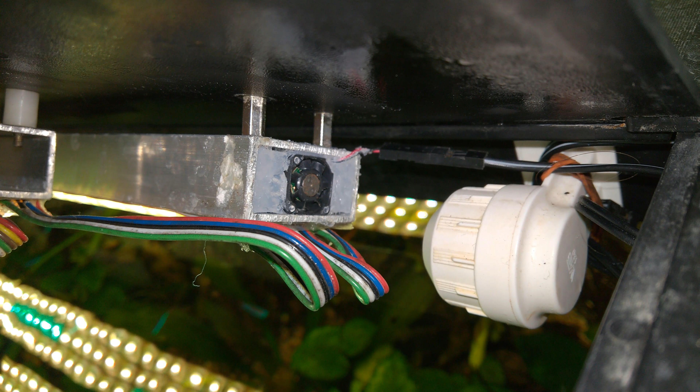This fan cools the LEDs. It is not very efficient, therefore I have to replace it by a larger one. A larger fan will require special fixing on the aluminium profile. That's why I'll have to produce a component on the 3D printer.

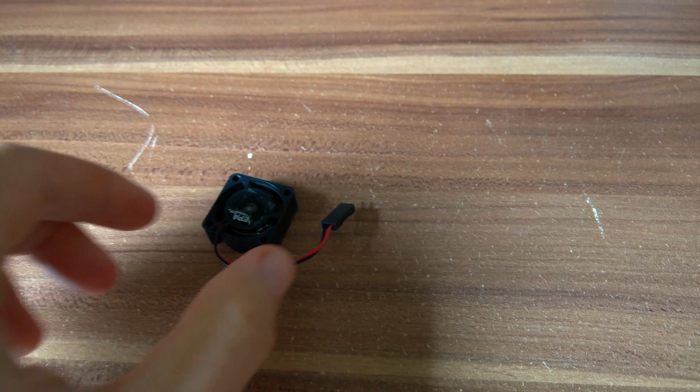This is the fan I decided to use. The dimensions are 25 by 25 mm with a thickness of 10 mm. I'll have to create a little cover for one side and a component to fix it on the aluminium profile for the other side.

I got some alternatives on eBay. This one has 17,000 RPMs with a thickness of 10 mm and the other is 7 mm thick only with 10,000 RPMs.

To be able to create some components on the 3D printer, I need to know the fan's dimensions. So I'll start searching for the corresponding datasheet first. In the datasheet, I'm primarily interested in the fan's dimensions.

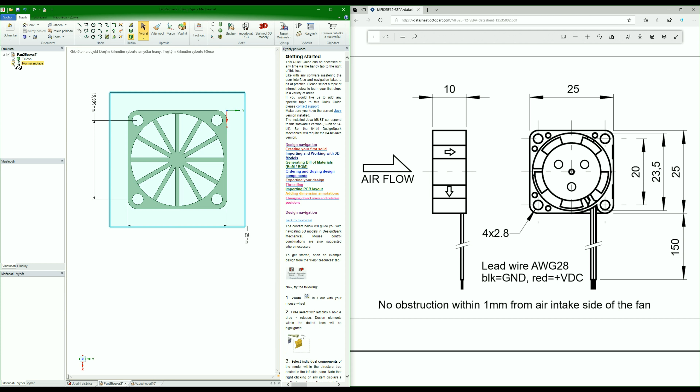To design components, I use the DesignSpark Mechanical application. Using the dimensions I found in the datasheet, I designed this little cover for the fan. Further, I designed this air duct. It will serve to fix the fan on the aluminium profile.

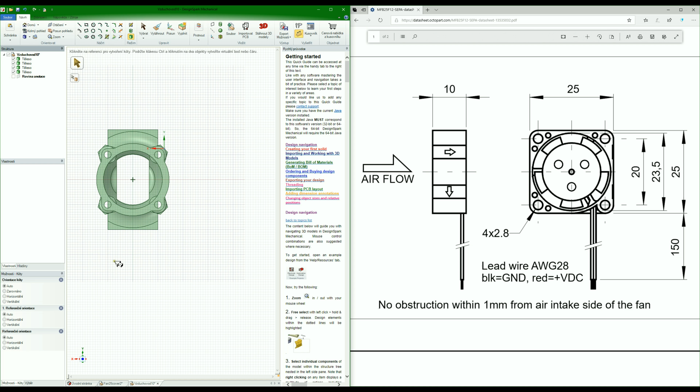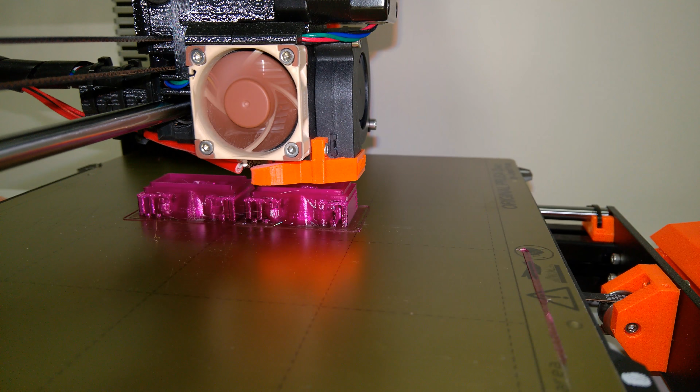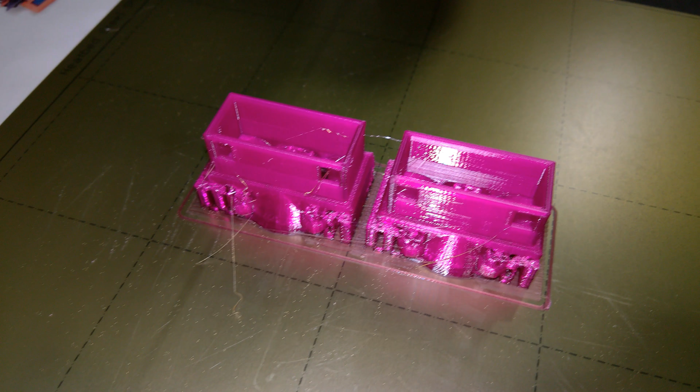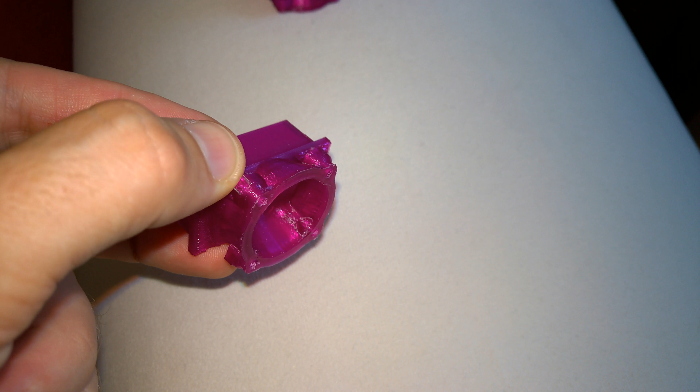Here we can see the components being fabricated on the 3D printer. These are the final products right after the fabrication. And this is the air duct after its cleaning. And this is the fan's cover.

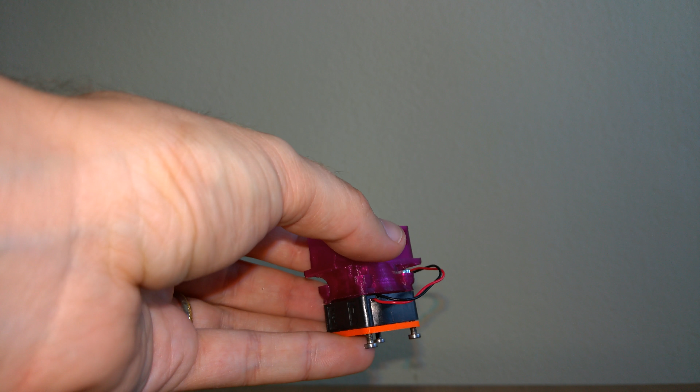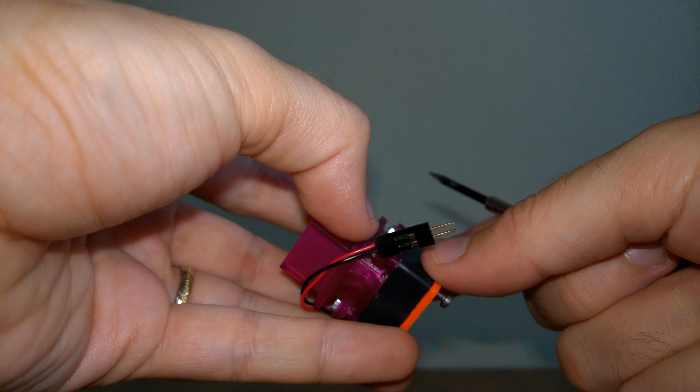Now it's time to assemble all three parts together. I used screws of size 2.5 mm with a length of 20 mm. The resulting module seems to be quite big. Let's check the space in the aquarium.

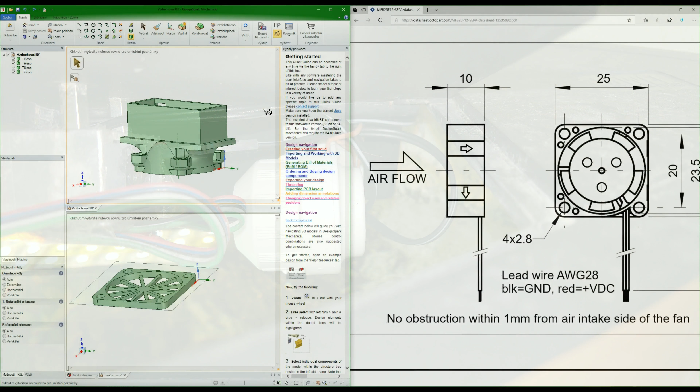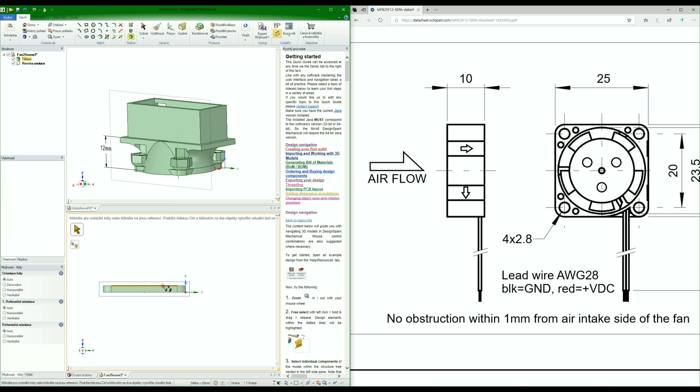The gap between the aluminium profile and the original fluorescent lamp holder is 17 mm. The thickness of the fan is 10 mm. The air duct depth is 12 mm. And the thickness of the fan's cover is 2 mm. Together 24 mm. If we add the screw head, we'll need 25 mm.

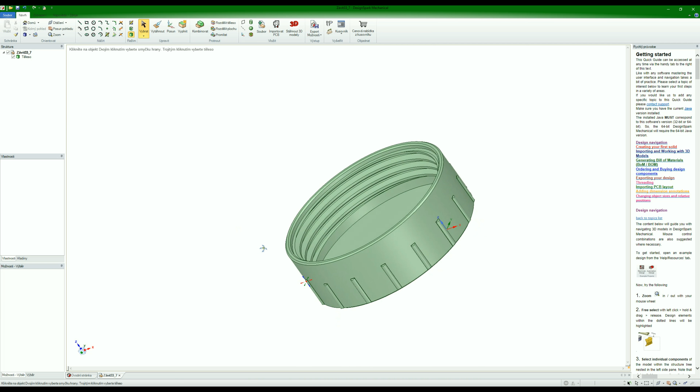I decided to replace the original fluorescent lamp holder by a lid printed on the 3D printer. To do so, I needed to measure the original fluorescent lamp holder and its thread. The lid is being printed on the 3D printer now.

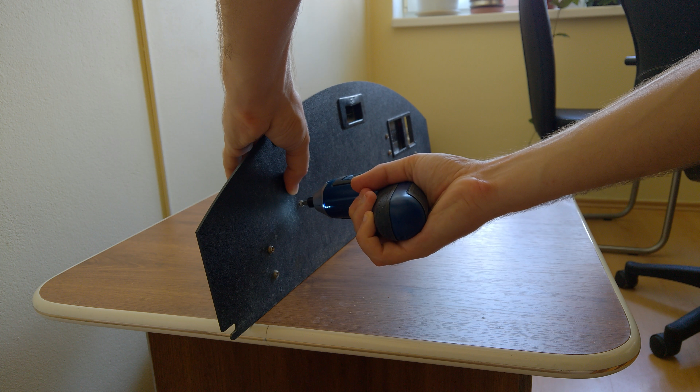And now I'm going to replace the original fluorescent lamp holder by the lid I produced. And now it's time to install the fans on the aluminium profiles. Let's start with the front part of the aquarium hood.

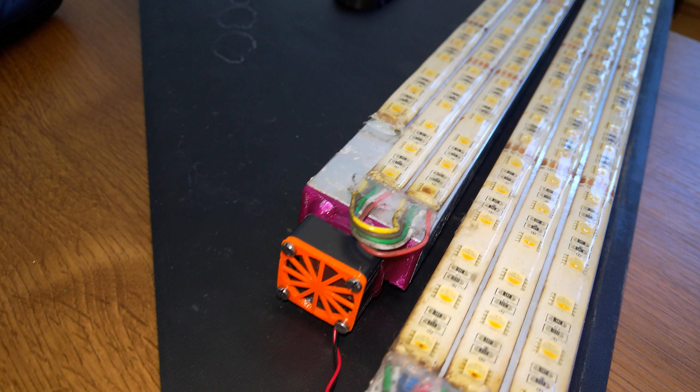Finally, these are the fans mounted on the aluminium profiles of the rear part of the aquarium hood. And here the fans running on the aquarium. This is the front part and this is the rear part.